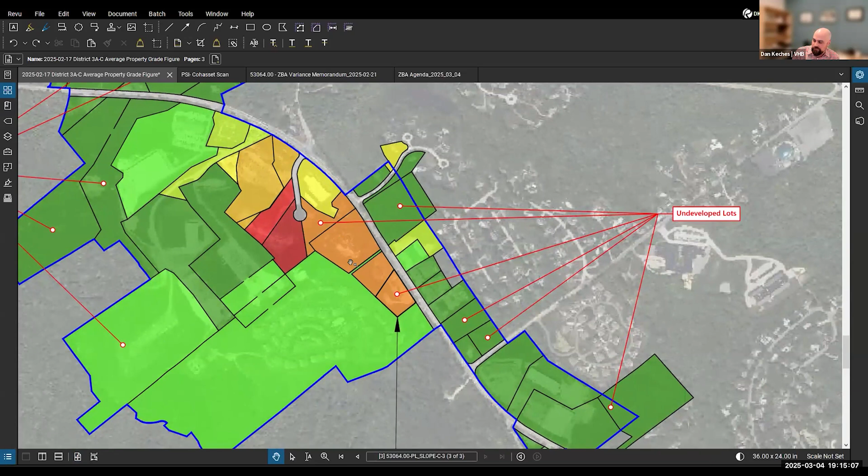Just for clarification, you're saying though that the 5 parcels that are in orange have similar? Yeah, it's a little hard to tell. There's actually 2 shades of orange, but the other 5 would be 1, 2, 3, 4, 5. So the 2 red and the 3 adjacent. Okay. Limited to just this section of Route 3A. Okay. Yeah, we can proceed unless anybody has any questions on this.

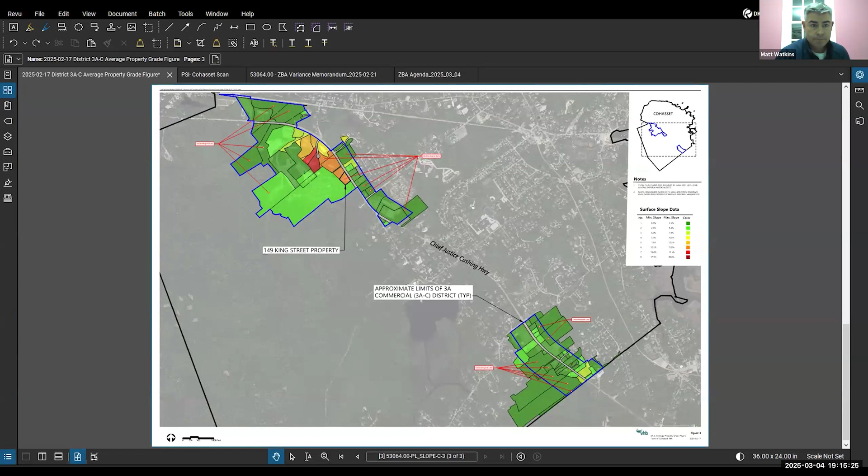Hi, good evening. My name is Chadd Ingram. First time meeting you. You are in receipt of my February 20th report. I'm a geotechnical engineer in a 20-person firm that specializes in soils, geotechnical, structural, and drainage relating to construction from Florida to Massachusetts. In the interest of time, I will keep this brief, and any questions you have, feel free to interrupt me, or we can certainly speak afterwards.

Essentially, we were retained to go up to this site to perform the geotechnical investigation. We're normally on a site 1, maybe 2 times. In this particular case, we're on the site 3 times for over 5 days, given the fact that the soils were very unique on site. As professionals, we rely heavily on NRCS mapping. That is the platform that we professionals use. And about 95% of the time, we find these sites to be generally consistent with what is mapped. This site would be an exception to that.

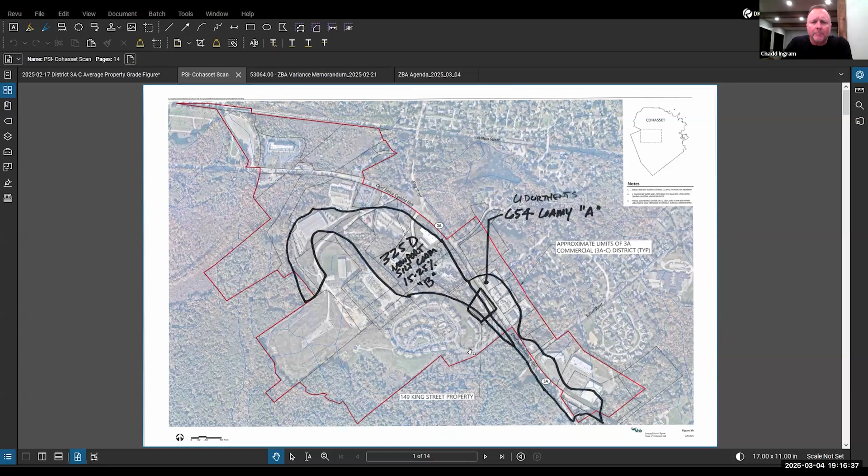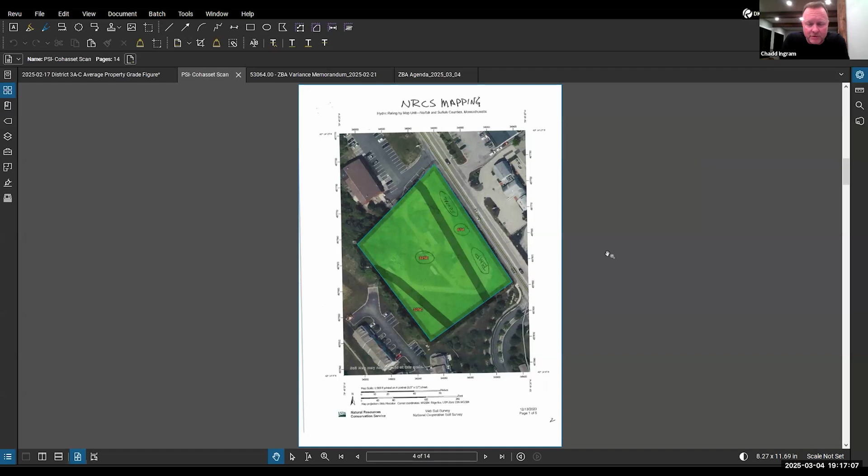We are anticipating going through the district. If you want to slide down, Dan, we were anticipating finding loamy soils, and see if you can keep going down for me, and very granular soils. Another sheet down, you'll see that 2 site soils here, loamy soils, well drained, good infiltration, moderate concerns of erosion. And in the front of the site, actually, excellent soils for construction, for septic, for stormwater. But again, this is not what we found on site. Next.

Right here, you'll see the 2 site soils, and specifically they have ratings of A and B. So they should have high infiltration, should be easy for construction, low potential for erosion. What you really have on this site are Cs and Ds. And the reason those groups are like that is a couple reasons. Number one, we found a high percentage of silt and clay on this site, not anticipated, coupled with the fact that you had historic consolidation and disturbance from decades ago. Having the fill and the disturbance from decades ago have put a surcharge on this site that further reduced these soils from having the potential of infiltration and also having a high potential of runoff as well as erosion. Accordingly, that has forced us to provide a lot of mitigation techniques that would not be used on most sites.

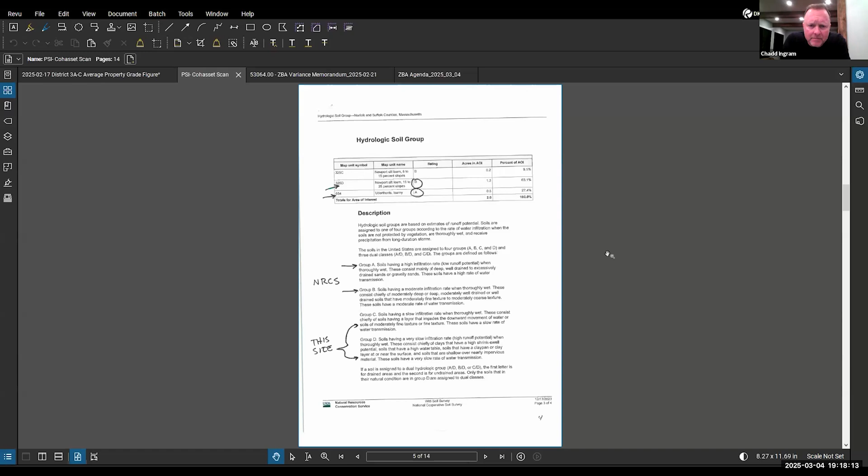Can you slide down, Dan? One of the things about infiltration is the front of the site, we expected to find very well-drained soils that consist of sands, sandy gravel, sandy loams. You would be infiltrating at rates, not to get technical, of 5, 8, 10 inches an hour. And as Dan goes through the next two slides, you'll see that's 0, that's virtually 0, and that's 0. So 60% of the tests we took out there have a result of approximately 0. And what that means is, though you do have some sands present, they are not functioning as the soil mapping indicates them to be. So this is an anomaly. This isn't something we normally see. And again, it comes down to high consolidation and the lack of the soils that should be on the mapping.

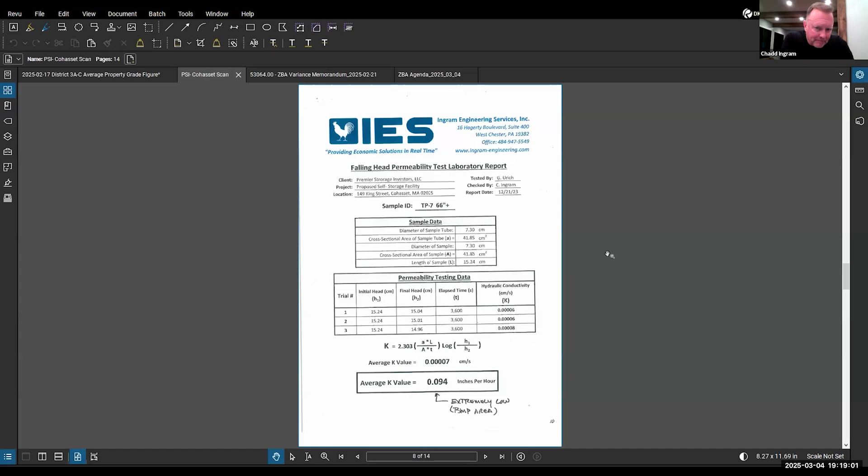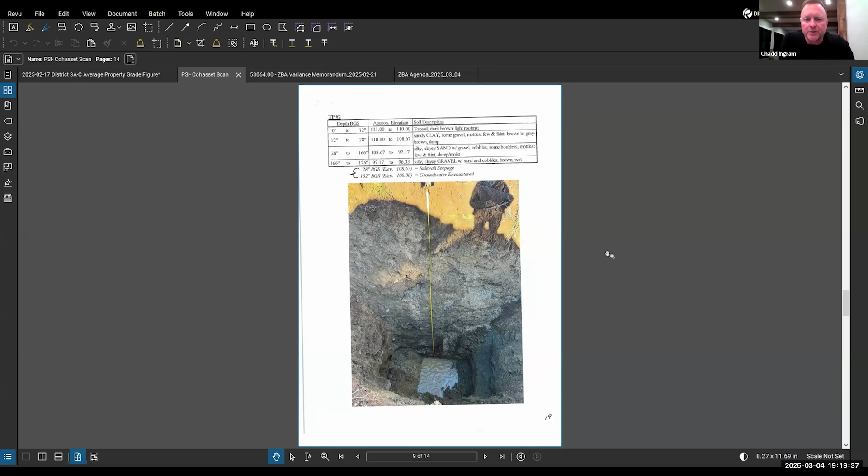Couple photos I put in here. And this relates to something called sidewall seepage. Again, very uncommon. We go out, we drill, we do test pits, we try to find groundwater, right? We want to find where the bottom is. And what we found was consistent with groundwater. We expected to find that. What's not consistent is finding sidewall seepage, or water seeping through the sides of the soil walls, not just immediately above the groundwater, but 7, 8, 9 feet above. In fact, these two examples we show here, you can see that we're literally 8 to 9 feet above the groundwater table.

Water is seeping through. And in this case, you've gone down, I think it's 12 feet, 144 inches, yet 5 feet down, you have water seeping through. And it just so happens to correspond to where the historic fill was placed. Consolidation has occurred. And what that means to all of us is, well, it now becomes very stringent to construct, and there's additional measures that have to be done in the form of under drains and similar infrastructure outside of standard construction to get that water away from buildings, to get that water away from your stormwater facilities, et cetera, get it on its way so the site can function as intended.

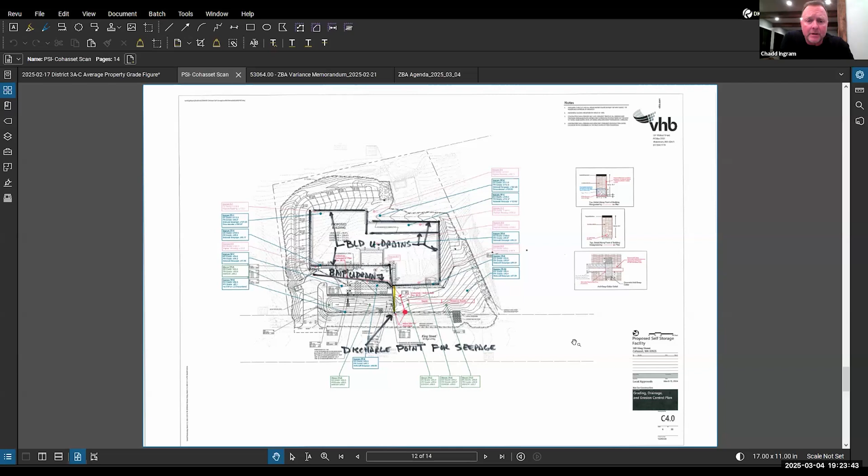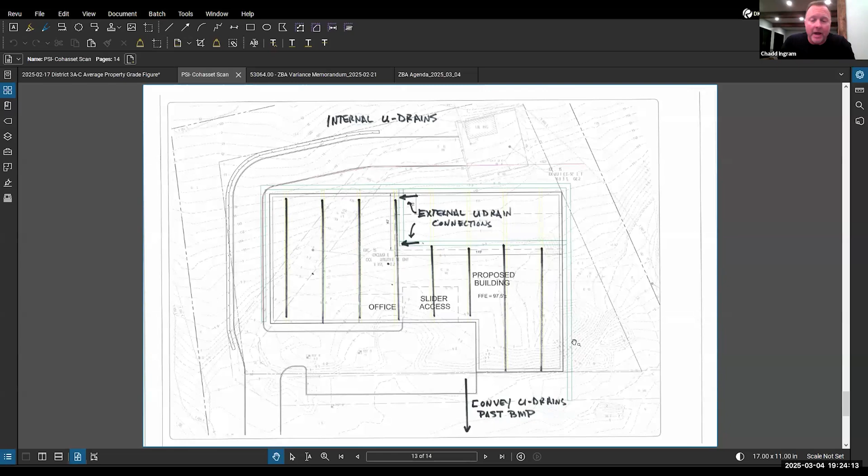You want to go down one more, Dan? Here's a building pad under drain. We called them fingers in the example for the cost estimate we put together. This is approximately 1 foot of stone with perforated pipe traversing in about 40-foot centers, 30-foot centers. Again, to make sure that that water, through what we call capillary action, isn't wicked up with the clay, having the slab get wet and causing moisture, high humidity, and potential mold within the building.

Slope stabilization. Because the soils are so consolidated, so stiff, so dense, so heavy with the silt and the clay content, and coupled with the perched water, which is very unusual, this isn't standard straw matting. The matting that I drew this up many months ago and gave it to Dan, this is very expensive synthetic matting that has to be put in by specialty contractors to ensure that during construction, and it would have to be staged in different areas in the sequence, as this is installed, then additional grading can take place and phased.

Because if not, on a normal site, you would simply seed it, put some matting down, and you're done. And in this case, it has to be done in certain phases to ensure that you don't have the erosion runoff with the sediment and obviously causing a violation. I know it's a lot of material. I'll try not to keep it too technical, but I'm more than willing to answer any specific questions any of you may have.

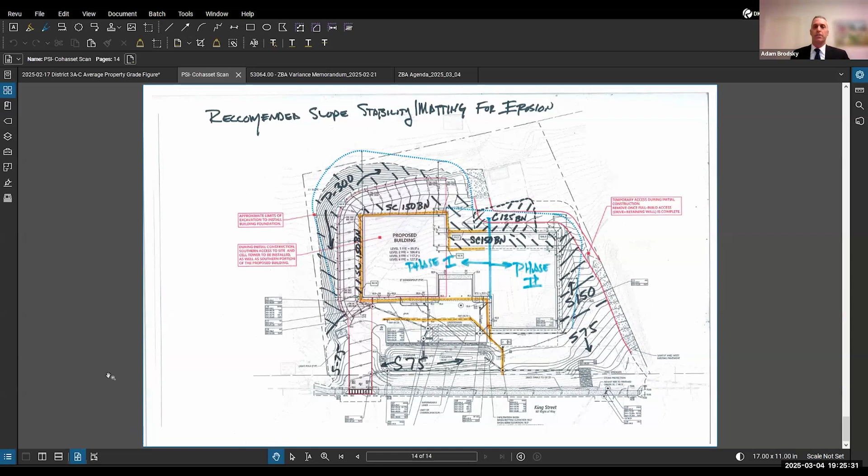Chad, this is Adam Brodsky. Can you just review the total premium and costs associated with all of these additional measures, please? Sure. Dan, if you want to go up a couple slides, I think I'm about $874,000. And that's for this site. It's somewhere around $200 to $250 a square foot, Adam. If you were to put in a smaller building, you would probably need slightly less. The problem is, as the building gets smaller, the square footage price for all of these additional mitigation measures would increase. So you could be looking at $300 to $400 a square foot.

I'm not going to speak to the economics or viability of it. That's not my skill set. But the bottom line is, no matter what structures put in here, these measures have to take place for this site to be a reality. And Chad, these are costs over and above the typical site and construction costs that you would find for a site like this? Correct.

And as I stated earlier, we run into a lot of jobs. We get hired to do problematic jobs along the East Coast. And hey, we've done 1, 2, sometimes maybe 3 portions of this. I haven't come across a site that we would have to do this many mitigation measures above and beyond your typical site work construction costs.

Thank you. I'm sorry, Mr. Watkins, for interrupting. No problem. I guess any board members at this point have questions for Chad?

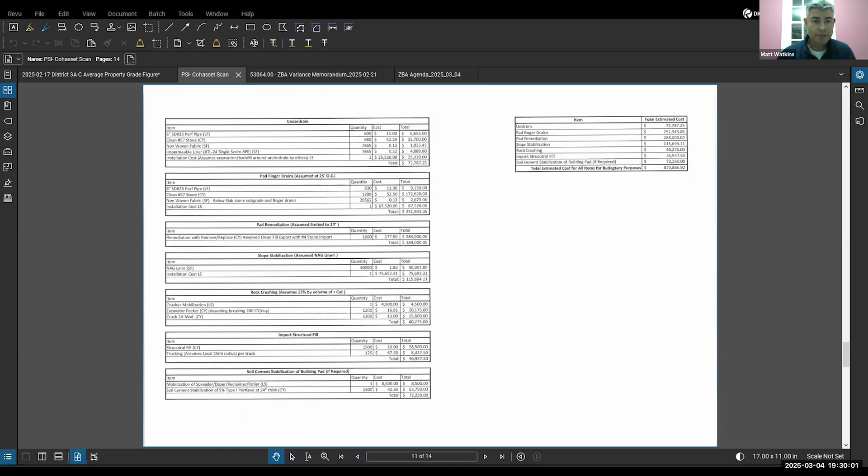Okay. Thank you. Certainly. If nobody has any other questions for Chad, we can proceed to the next portion. Thank you, Mr. Watkins. Greg Morse?

Great, thank you. For the record, Gregory Morse, registered engineer, Morse Engineering. I've been working in Cohasset over the past 20 years on similar site development projects. I'm a licensed engineer with the state. I'm also a licensed soil evaluator with the Department of Environmental Protection. I started work on this site back in 2020. My firm conducted soil testing at the site, and I just wanted to concur with everything that I've heard so far today, which is that this is a unique site.

The soil testing we did, where we were able to get percolation tests passing for a septic system, was extremely deep. The perc tests were down 18 feet and 16 feet below the ground surface. It was not up closer as you would encounter on other sites. I've worked on several other sites within the 3A commercial district. The figure that Dan Ketchus had put up earlier showed the location of the district in Cohasset, which essentially is broken up into 2 parts. There's what I would refer to as the southern portion of the district down near the Scituate town line.

Down there, I've worked at the O'Donohue Insurance Company, the Mulaney's and Theodora's property, the Amalang Tradesman Building, and the Village Greenery. I didn't have these soil conditions, nor did I have the topographical constraints at any of those locations in the district. The district is relatively flat, and the soils are generally suitable for septic systems and generally suitable much closer to the ground surface.

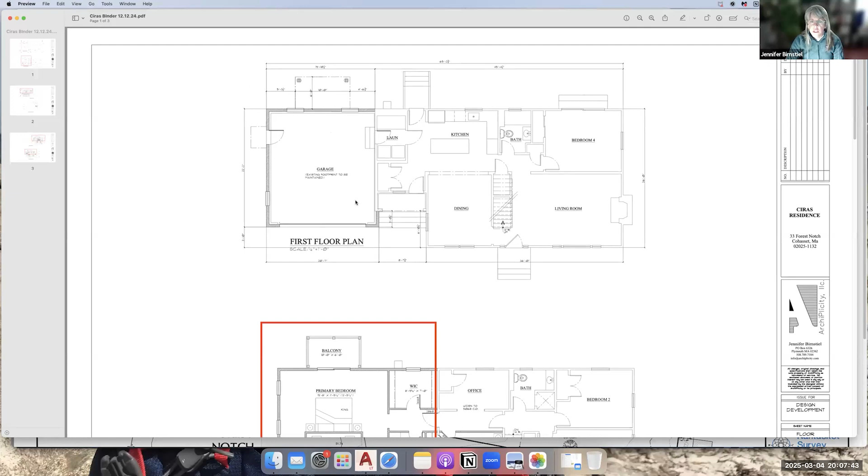So I'm gonna share, I'll actually share the site plan first. Right now, we are looking to add a, can you see this okay? Yes. We are looking to add a second floor on an already existing garage footprint. The corner of the footprint currently sits within the setback.

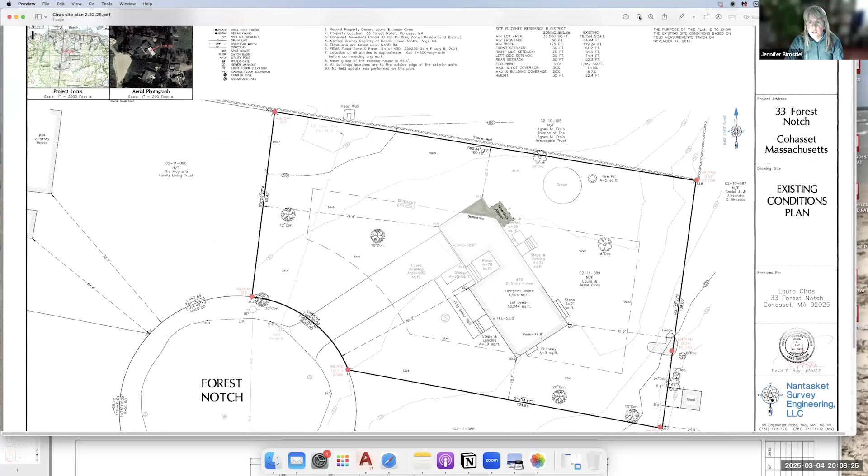This lot, though, is a corner lot, so it has kind of a not quite typical layout as far as the lot setbacks are concerned. So I spoke with the engineer who thought we might qualify for a special permit based on the current footprint of the house. This is currently within the setback.

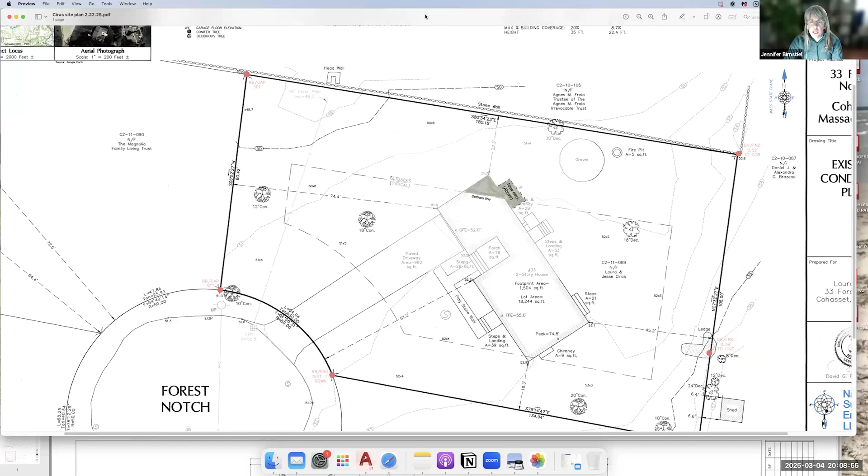The new deck would be partially within the setback and partially not, but we're planning on keeping this exactly as it is and just adding a second floor on top of it. And I will share the actual plans and elevations so that you can see them also.

So this is the existing garage. It may or may not be that we can keep the existing foundation, but we're keeping the existing footprint. It all depends on how far down the foundation goes. But right now we're maintaining the exact footprint of the garage. And this is the primary bedroom suite that we're adding on top.

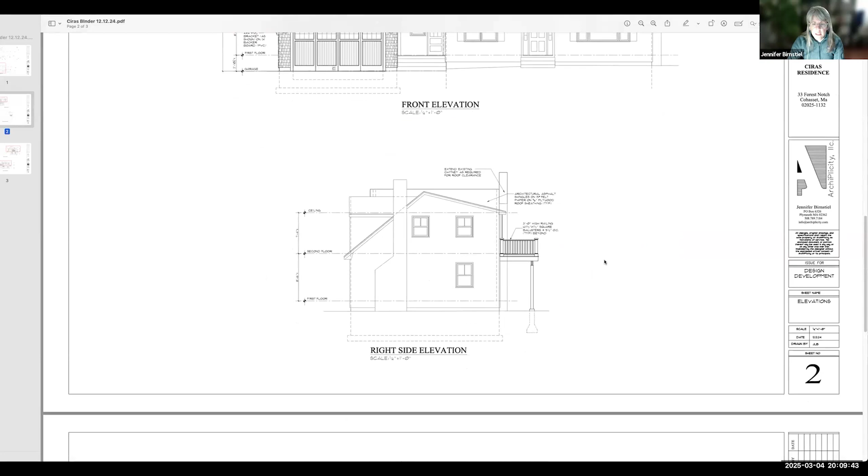And this is the change in elevation. We're trying to keep the roof lines low so that the height of the garage doesn't exceed the height of the existing house. And the deck is just a raised deck on posts outside of that footprint. So very simple and not very big. The balcony is 10 feet by 6 feet, just enough to put a couple of chairs out there and sit and look at the backyard.

And this is the way it looks from the back elevation and from the left side elevation, where you can see more visibly the corner that is in consideration. What's the height of the current garage? The height of the current garage is 17 foot 8.5. Yeah, that's good.

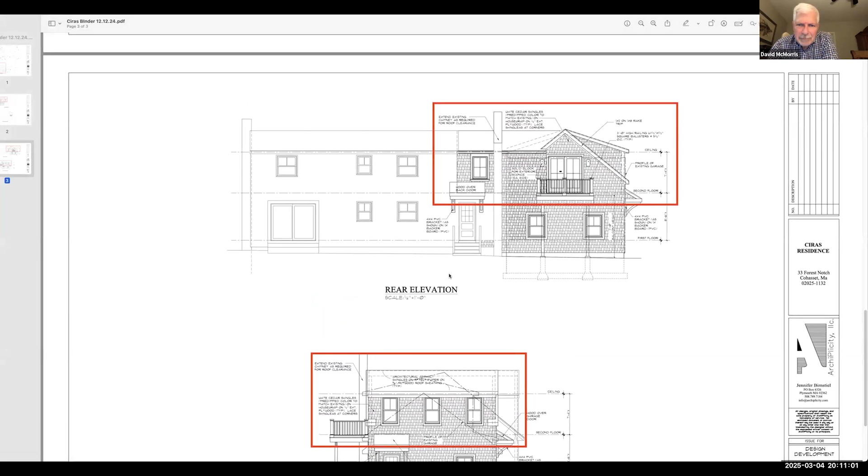And I can share my AutoCAD screen too if you want a picture of the existing. No, it's currently non-conforming, which is good. So you're not creating a new non-conformity. Okay. Anything else you wanted to review with us, Jennifer, or I could open it up? No, I think you can open it up. It's pretty straightforward what we're looking to do. We're trying not to rock the boat, just get them a little extra space.

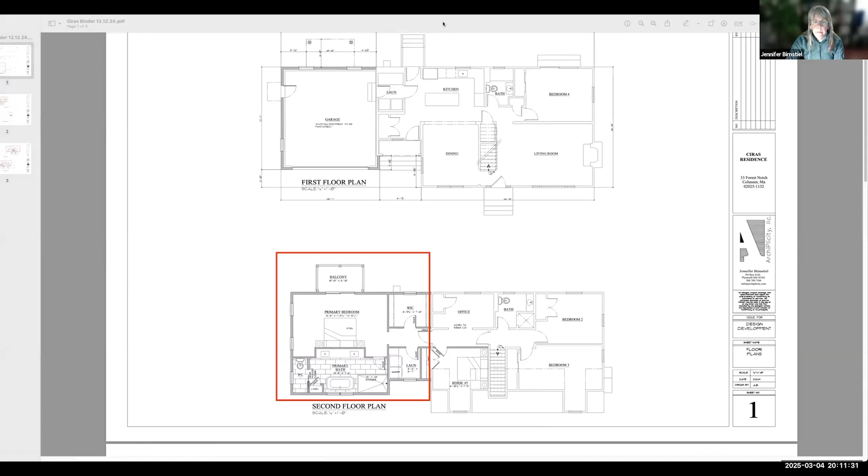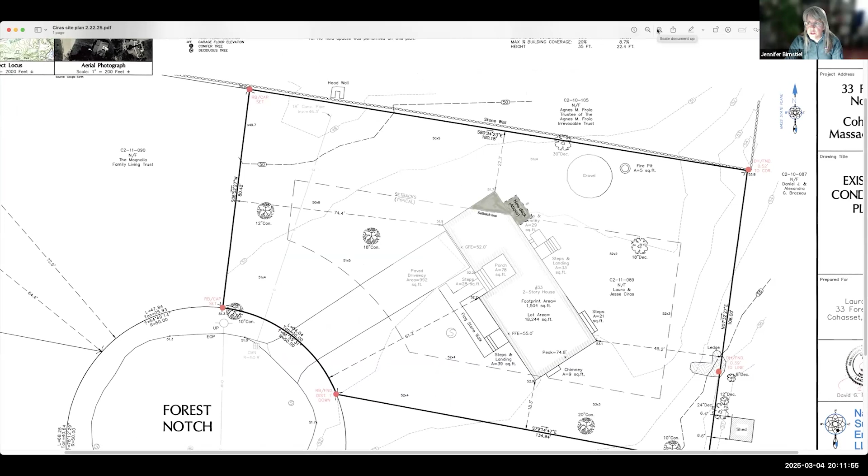Can you show that first diagram you had up, the shaded site plan? Yeah. And I can zoom in if it makes it easier too. And the new deck you say is off the second floor, right? Yes. All right, I'll open up to the board for questions.

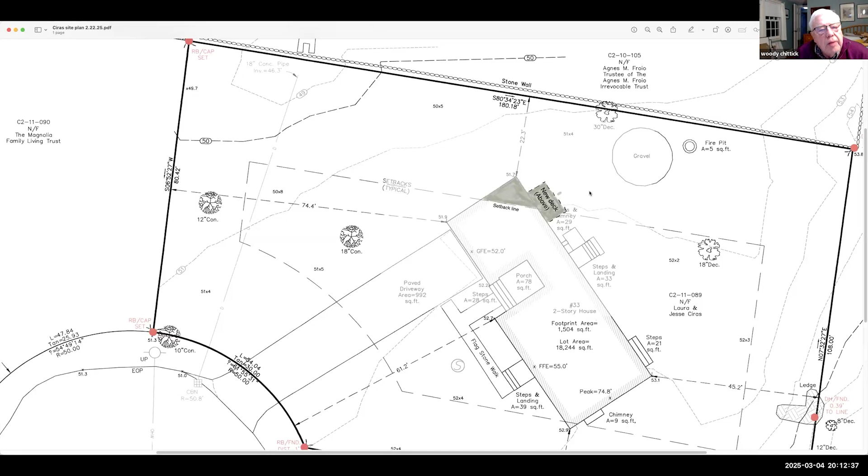Well, why don't you address the key issue in the relief you're seeking, this is Woody Chittick, which is: is it or is it not going to be significantly more detrimental to the neighborhood? I think we understand what you're doing. Yes, and we don't believe that it'll be significantly more detrimental to the neighborhood because it's not visible for the neighbors. It won't impact the part that's visible, and won't be impacting any of the other neighbors as far as the appearance.

And we believe that the appearance of the new addition that is conforming will add to the look of the house versus being detrimental as far as its appearance. And the nonconformity won't be visible from the street. So I don't believe that it'll add to the impact.

And have you heard from the neighbors, particularly the Froios, who will be looking at it? I have not. Ross? I don't know if Jesse has heard from anybody. We have not, but we can reach out. It's always certainly a courtesy.

I mean, yeah. I am the owner of the Magnolia Family Living Trust, which is the abutter. So I just wanted to get that on the record. I'm the closest abutter. Because I am the abutter, I cannot make any comments or participate in any voting for this special permit. Okay, thank you, Lee.

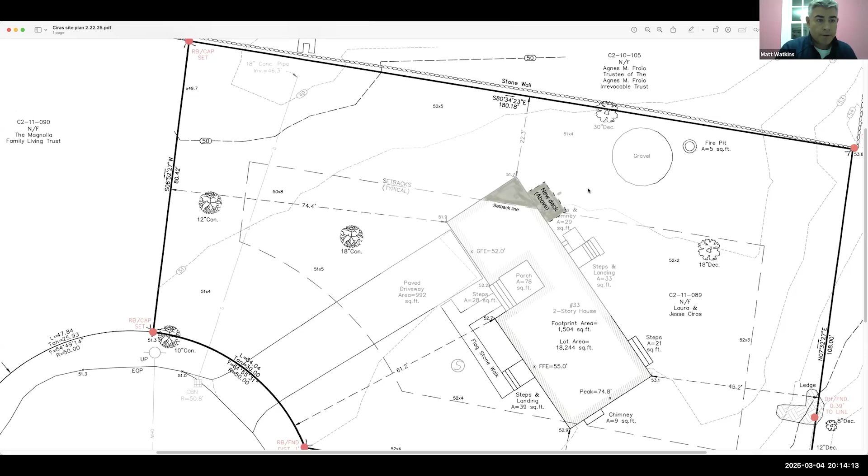Charles Higginson. I'd like to note that none of the neighbors are shown on this site plan. I believe we've asked everybody to do that. Correct.

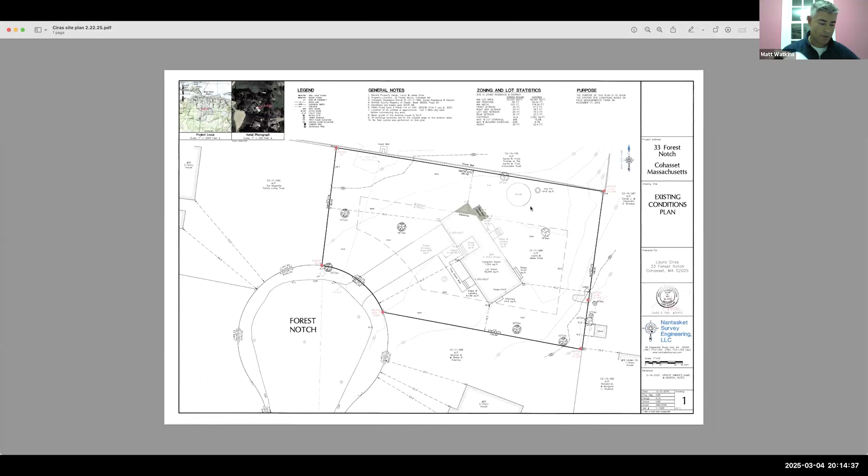Although I think this is a zoom? I wanted to say on the initial, I think this might be zoomed in. Yes, that was zoomed in. So it does have the neighbors shown on there. I was just zooming in so you could see it better. My house looks like it's shown on there. It looks like I have a big yard in the front.

Yeah, it looks like it's an old site plan from 2016 on the one that I have in my packet. But it does look like the abutting structures are on there. Other than the Froios, whom I do not know, but they're the ones that are going to see this. The other people are kind of unlikely to see much, given the vegetation and things, having looked at it.

It may not be a problem, certainly. I'm not suggesting it is, it's just a comment. Who knows the site? Yes, I do know the site. The line between the Froios and this site, it's wooded. It's a wooded strip that fills out completely in the summer, so you can't see anything. And in the winter, it still stays pretty foliated.

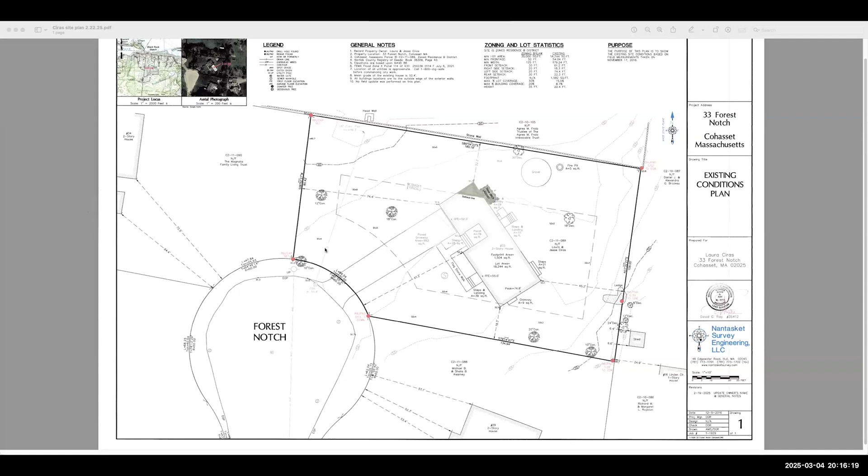Yeah, thank you. It's pretty much brush throughout the winter. And then in the summer, the trees fill in. You really can't see any of the neighboring houses in the back area. I was just going to look and see. I have some pictures of the existing site. I don't know if that would be helpful. Well, most of our board goes out to the properties prior to, so I think we're fairly familiar. Okay. If you have it handy, you could put it up in case somebody hasn't seen it.

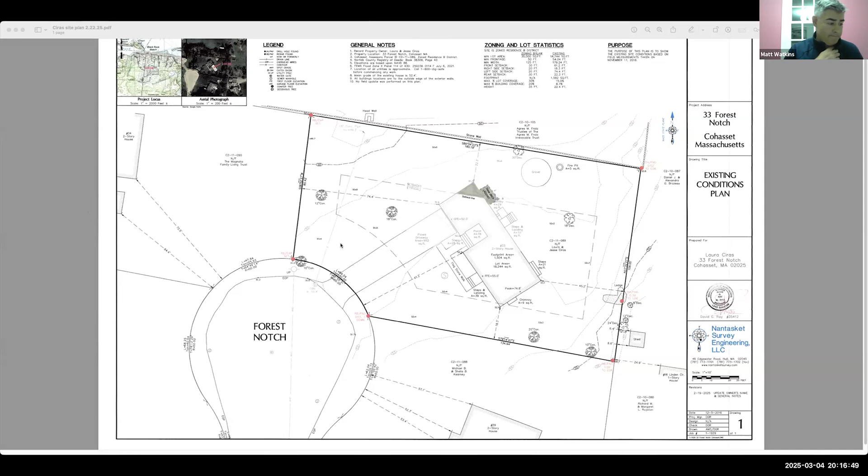This is a picture looking in that direction, so you can see the foliage from here. How wooded the site is behind the house. That's another view, and then looking in this direction.

Well, the only reason I brought it up was as a matter of courtesy for the neighbors, not that I suspect that they'll object. I have no idea, but I didn't see anything that seemed egregious. No, we agree, and that would be our intention prior to making any moves in terms of construction there. Well, something for us to consider, but be that as it may.

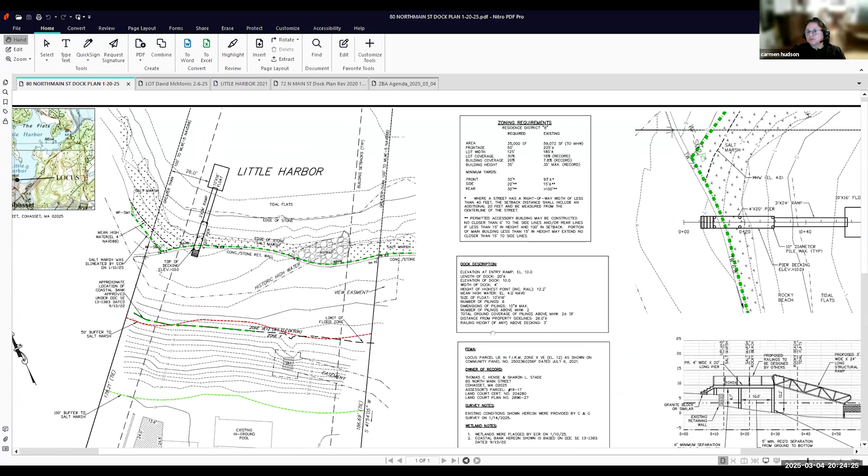This is a dock application. The site is located at 80 North Main Street. It has been developed as a single-family residential property. The house is currently under construction. The lot and the building are conforming to all of the zoning requirements. The dock that we're proposing is going to be in the rear, right here where you see it. The property on the left is 90 North Main Street. The property on the right is 72 North Main Street. This is a closer view of the dock.

The pier will be 20 feet in length. It will have a 3-foot wide by 24-foot ramp with a 10 by 16 float. It is going over a very small portion of salt marsh. There will be a total of 6 piles supporting the 20-foot pier. Stairs will be on the landward side. And the float, which is the portion of the dock that is closest to a property line, the side property line shared with 90 North Main Street, is 26 feet away. So it's greater than the 20 feet required by zoning.

As you know, Section 9.4G5 has the requirement that the ground footprint of a dock cannot exceed 200 square feet. We only have a total of 6 piles, not even 6 square feet in footprint. They cannot exceed 20 feet in height. The maximum height here is 12.2 feet. We're proposing 3-foot railings.

We also wrote in our application the reasons why the dock project can be approved. That's under Section 12.5A. And most of this, as you know, is for all special permits, so they really don't apply to docks. Ingress and egress, traffic flow, and fire access is not applicable. Pollution to water facilities and drainage also is not applicable. Regarding noise, vibration, light, dust, smoke, heat, glare, or odor, this doesn't apply either, and we're not even proposing lights on the dock. Refuse collection is not applicable.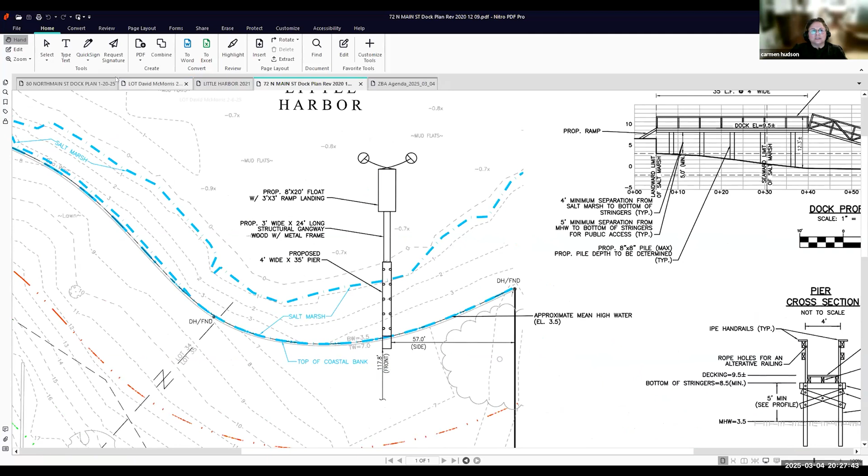And regarding any comments, we have received an order of conditions from the Conservation Commission, and we're not aware of any comments from the Planning Board or the Board of Health. And at this time, I would be happy to answer any questions the board may have.

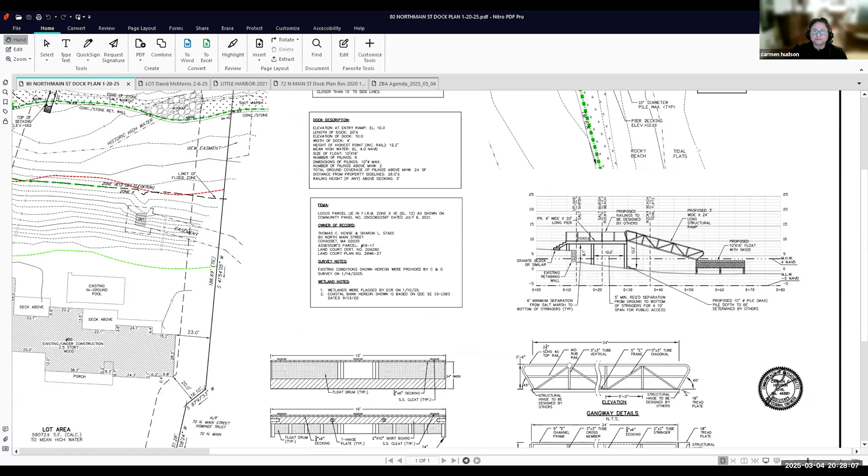Great, thank you, Carmen. Thank you.

Yeah, actually, you know, I wrote the decision on 72 North Main, the dock next door, and I did look that up earlier today, and it's very similar in proportionate size. And actually, even the float had got narrowed a little bit by the Conservation Commission, so it's the exact 10 by 16.

And it seems to me like that dock is pretty appropriate for that area, and the dimensions that you mentioned with the square footage and height, setbacks, etc., seemed pretty standard to me. So I don't have any questions, but I just figured I'd mention that to the board too. I did look up that 72 North Main. It seemed to be very similar in size and scope to that.

Any board members have questions? Nope. No, Matt, another one that looks relatively straightforward. Okay. Any members of the public have questions, comments? If you could either raise your hand and we'll promote you, or if you'd like to put a question or comment in the chat.

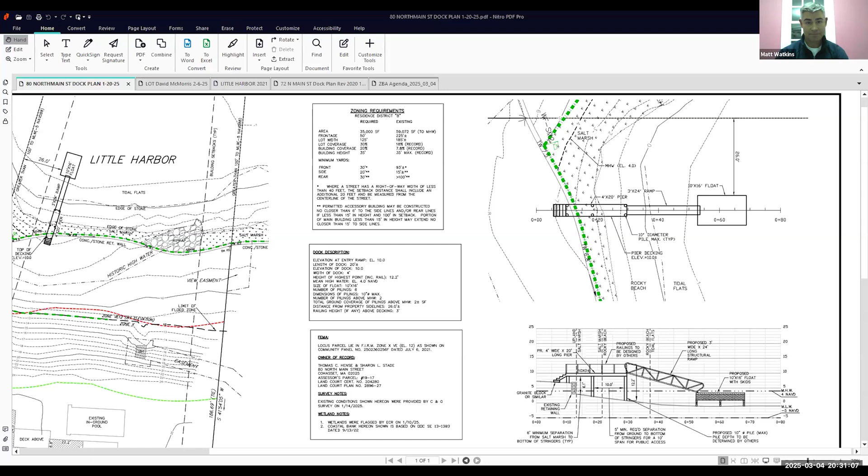Okay, yeah, I'll second it, but let me just, Carmen, one point. Once we start deliberations, the hearing is closed anyway. You or your clients can't speak, so it's a judgment call on your part. That's what Matt was alluding to. If there's new material, you probably should be here. If there's no new material, it's pretty unlikely any will be introduced.

Okay, so since there are no questions from the board or from any abutters, there will be no new material submitted by us? Can't say, but if there is a blockout period, what is it, Julia, 1 week or 2 weeks of information? It's generally a week and a day, so it's the Monday before. We don't allow last minute submissions unless it's pretty significant.

Yeah, I think the only thing I was saying, Woody, is technically, because the hearing's continued, we have to open it, which means somebody could have public comment. It's very unlikely. What I would say is if you were on that portion and there's no public comment, you don't want to hang around for the rest of the meeting until we deliberate.

And we don't have anyone tonight, but in other words, we're not making a motion tonight to close it because we need to get a draft decision for the next meeting. There's an outside chance that somebody could come with a comment. Okay. I didn't mean to complicate things. Sorry if I do.

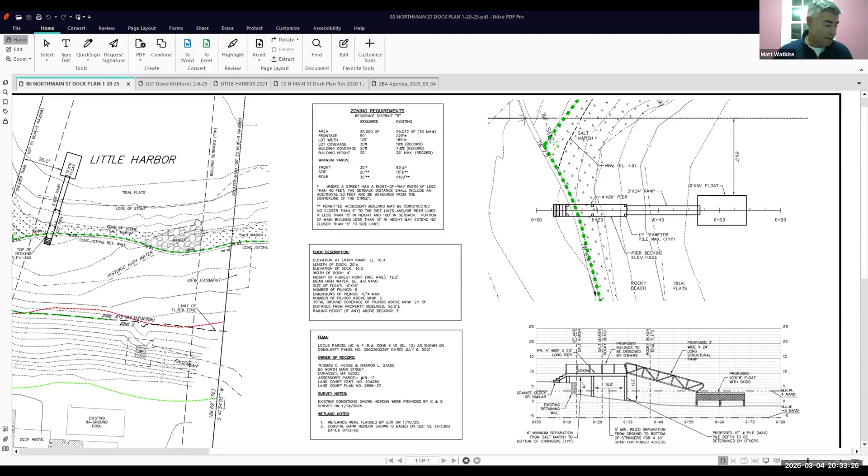Our next item of business is a special permit for 95 Atlantic Avenue, which is an application for a special permit to expand the single-family dwelling. This is Woody Chidick. I'm recusing myself in this one. Okay, thank you, Woody.

And it looks like we've brought John Landy forward. And Yasmin, if you guys could introduce yourself for the record and your affiliation. Sure. This is John Landy. Sorry, I'm not on video, I'm in a hotel room. We're a property owner with Yasmin Landy. Hi, I'm Yasmin Landy. As John said, I'm his wife, and we recently purchased 95 Atlantic.

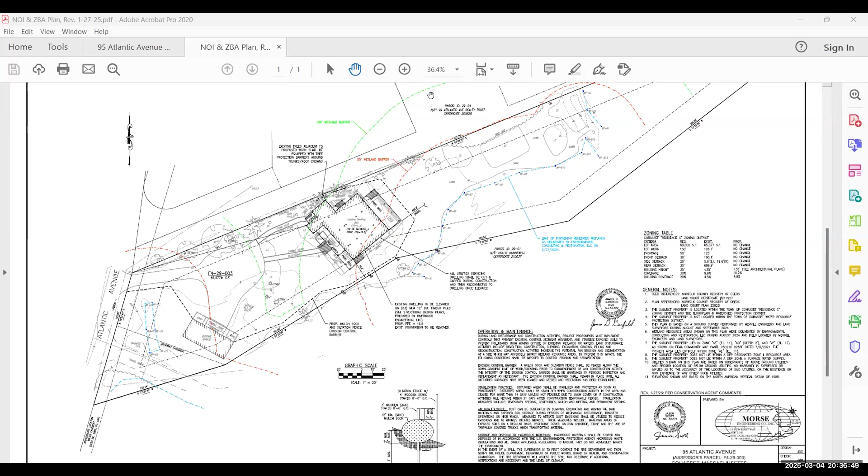For reference, the existing ground contours around the home are at elevation 9. And the existing home sits at elevation 11.5, so basically right at the 100-year floodplain. The lot itself is conforming with respect to zoning, but what's non-conforming with the house is the lot width. The lot width is required to be 150 feet, and how it sits, it's 128.7 feet. And secondly, the side yard setbacks. On the left-hand side right here, the existing home is at 5.6 feet from the lot line, while 20 feet is the requirement. And on the right-hand side, the right corner of the house is at 19.6, where 20 feet is the requirement.

The proposal here is really two parts. The first portion is to raise the elevation of the home. The home would be lifted up. New timber pilings, a total of 63 of them, would be placed underneath the home. The home would then be put back down on top of those piles at a higher elevation. We're proposing an elevation of 16.5, so it provides significant freeboard above the 100-year flood event. The pilings are designed in accordance with NFIP and FEMA requirements.

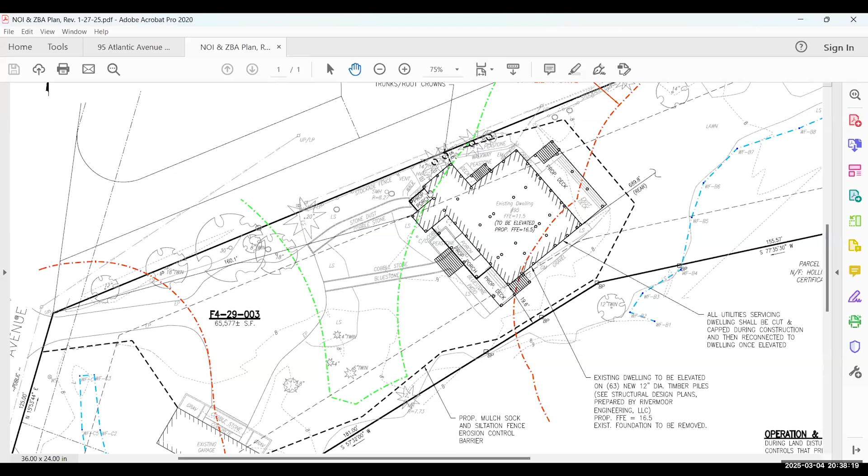In addition to that, we were reconstructing and altering a couple of porches and decks on the property. The front left corner here, we're adding a small portion to an existing porch, and I'll go to the architecturals in a minute to further detail this, because this is a covered porch and it is within the side yard setback. On the front of the property, we're adding a porch with new steps on the front. We're adding a new deck on the side of the building with egress stairs down. And on the ocean side of the building, where there was an existing deck, we're slightly expanding that and providing new steps down as well on that deck.

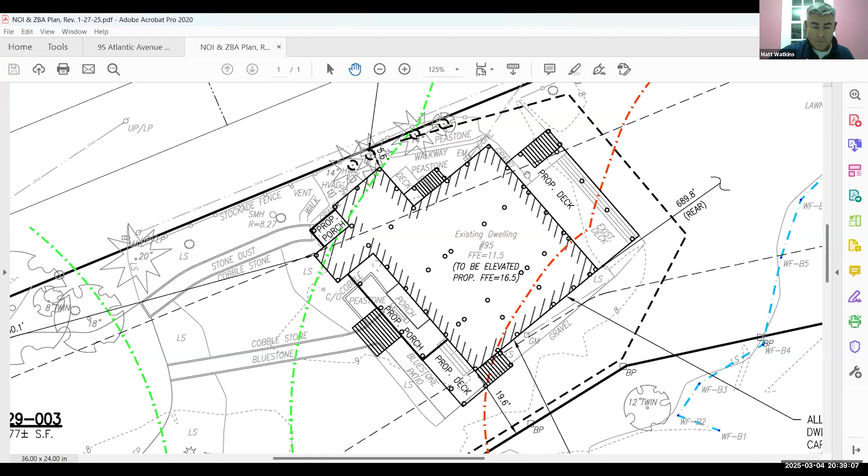And Greg, the 63 pilings, what was the height of the pilings? So the top of the pilings will be at elevation 15 approximately. And then we have approximately 1.5 feet of beam and floor system to get to the first floor elevation of 16.5. Okay. Let me just get the architectural plans here.

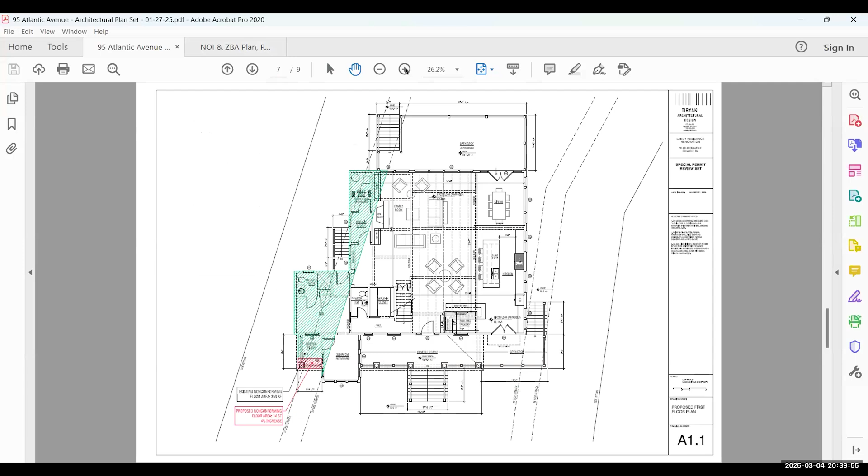So on the architectural plans, what John detailed on the first floor plan here is that front porch that's at the front left corner of the building inside of the setback. We were adding a small amount of space to that, which is highlighted in red here. He's highlighted in green the area that's non-conforming with respect to the side yard setback on the left side. In red is the expansion. That expansion is approximately 14 square feet. It represents a 4% increase in that covered porch area. These are not enclosed porches. These just have roofs over them, but they are not enclosed porches.

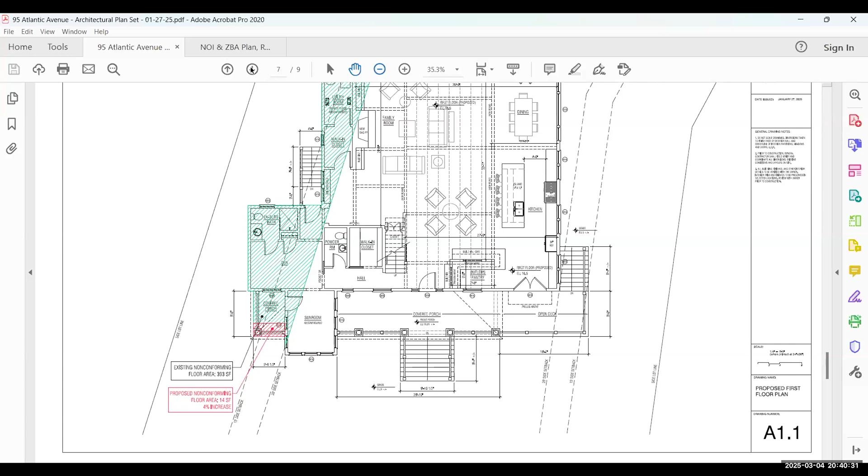And building height, we have a diagram of building height. The building height here, even with the raised pilings, is compliant. It's a 35-foot maximum height in the zoning bylaw. We're coming in at 33 foot 4 inches for the max height, and that's from the average grade around the building to the top of the roof peak. So it is compliant height-wise.

In the zoning bylaw, section 8.3, the board is authorized to issue special permits for structural changes, extensions, and alterations if it finds that the proposal is not substantially more detrimental to the neighborhood than the existing non-conforming structure.

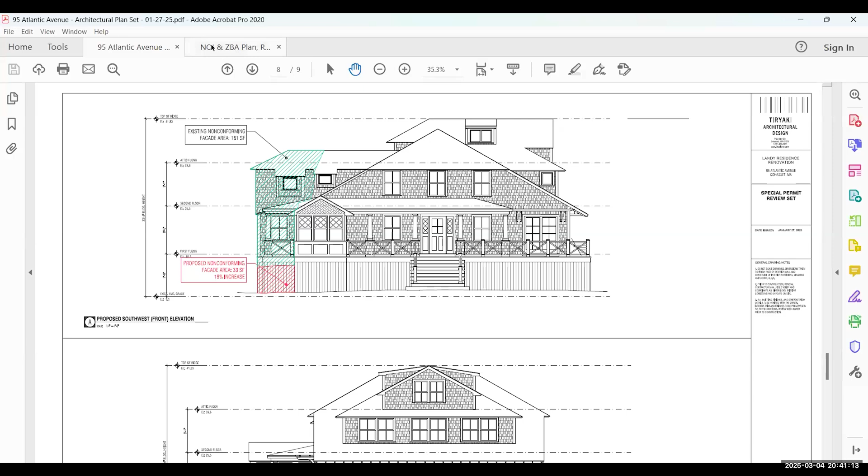Going back to our site plan, the proposal here is no closer to the property lines than the existing home sits. It's open decks and open porches. They're not new enclosed living spaces. The height is fully compliant. The foundation is fully compliant with FEMA, so it's in better compliance with FEMA standards.

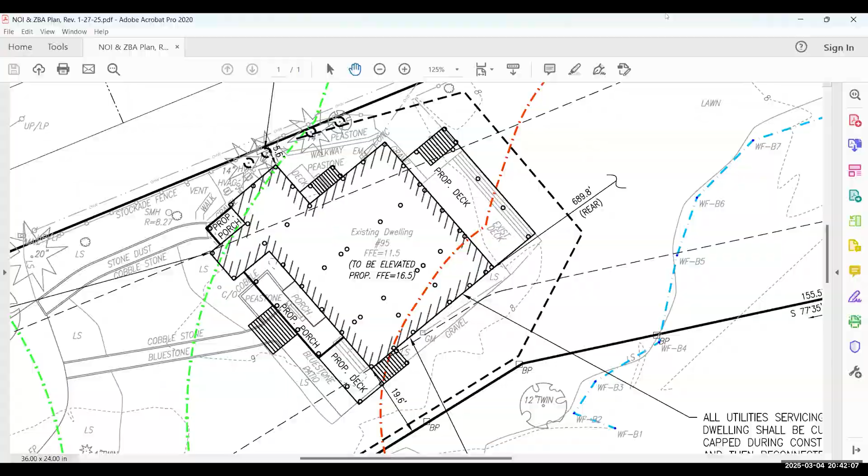I would add that the Conservation Commission has already reviewed this project and issued an order of conditions. The board was sent a copy of that from Charlotte Pechtel, the conservation agent, during the comment period. I'm going to turn it over to you for questions or comments. Okay. Board members, any questions for Greg? Or to me.

Again, I note that there are no neighboring buildings shown on the site plan as our instructions ask. Yeah, I did notice that when that was brought up at the previous hearing. We could certainly add the abutting buildings. We're not working closer to them than the existing conditions at the site. I apologize, that's not on the plan.

But yeah, that is one of our requirements, to have the abutting structure. So if you could add that to the site plan and just submit that prior to the next meeting, that would be helpful. Yep.

Yeah, I was just double checking. The reason I asked the question on the height was that the existing home is like 28.3, you have. And the piles are 15 or 16.5 feet? Correct. So that's an elevation. Okay. 16.5 is the first floor elevation.

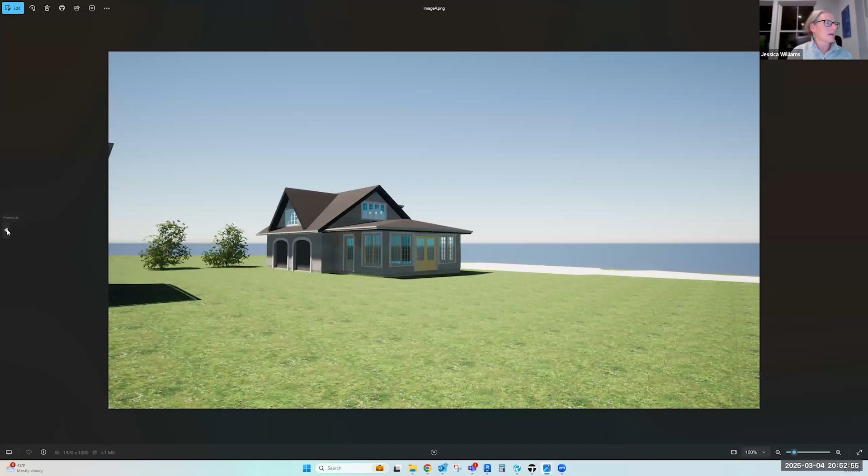This is just an image of what the garage will look like. And from that easement, this is the easement. There's actually a couple of trees, and we would actually go through between the trees to get down to where the garage is. The garage design is intended to look very much like the house. This is the design of the garage. We meet all of the requirements. I'll just go to the site plan here.

For an accessory structure in your zoning bylaw, under your dimensional regulations, there is a note for 7 and 8, which allows that for an accessory structure that's under 15 feet, you can be within 6 feet of your side setback in 2 directions. However, this is our front setback. This is Forest Ave here.

And while we are well beyond 100 feet from the easement to what we consider the front of the garage, the house is oriented so that Forest Ave is the address. So this is considered our front. So our setback is only 60 feet; we can't meet it to 100 feet because we only have 115 feet of lot to work with. So that's where we are asking for the variance.

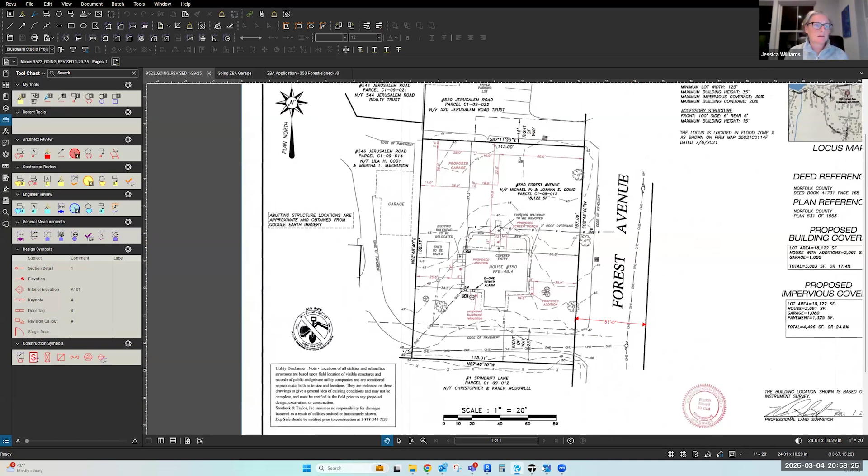And you can't use that right of way to the north, that comes off the parking lot of the neighboring house? You couldn't access it that way? The intention of this design is to improve the site. The house currently, we are no longer using the front door as a front door, and the Goings would like to access their house from the easement that they own, versus having to use a right of way that they don't own. So this would just keep all of their activity on their own property versus needing to use a right of way on another property.

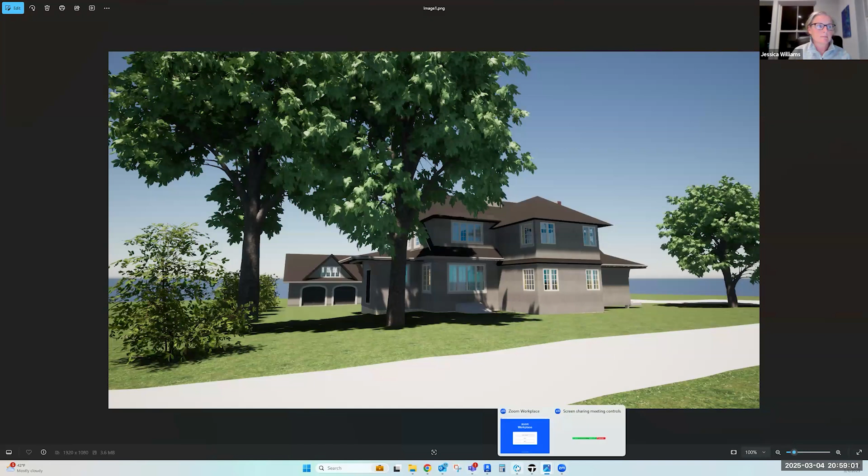Okay, well, I'll turn it over to Dave and Matt and everybody else in just a second, but if you're going to create a nonconformity, which is what you're doing by locating the garage here, you have to pass the 3 tests of a variance, and you should address that. You're creating a nonconformity, and so you should address those 3, I think, really up front. So I'm gonna reference the bylaw so that I have that in front of me. But the request for a variance is under, excuse me for 1 second, 12.6.

May I jump in for a moment, Jessica, just to come from an aesthetic viewpoint? The dumpsters are behind the garage, and for us to access the garage using that right of way would be difficult because that's where the dumpsters are located for the condo building next door, to the left of their garage. If I can be honest, if there's a way we can put our garage there so we're not looking at dumpsters, that would be great. So just in that sense, to do a variance could be a worthwhile thing for us as the homeowners, but I don't know if that makes sense.

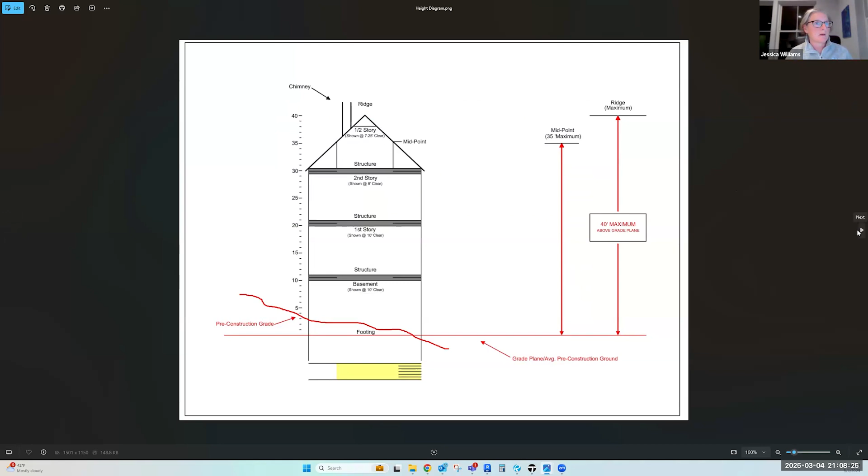I am embarrassed that I was not right about this. Interestingly, I have asked the building inspector and was not told that I was wrong. So, okay, we'd like to ask for a continuance and we'll take a look at what our options are. Thank you. Excuse me, if I may interject, I just want to help clarify a few sections of the bylaw just for your reference. Okay.

So regarding the three criteria for the variances, that is found in section 300-12.6. So it's basically right out of chapter 40A. It lists the 3 criteria, including the soil conditions, shape, and topography, the literal enforcement of the provisions, and then the substantial detriment. So you can find those in that section. It's referenced in your application as well, and I can send you the link separately if you have trouble accessing that.

Also, I just wanted to clarify, Woody, are you referring to the definition of height in section? Okay, I am seeing that. And I can send you that link as well, Jessica, if you need to review that. John Hallen, the building inspector, is not on the call tonight, but I can confirm with him these references that are on the website and get his perspective on if those are outdated and need to be removed. I apologize if they're on the website and inaccurate, but I will check with him to see how those stand with the building department.

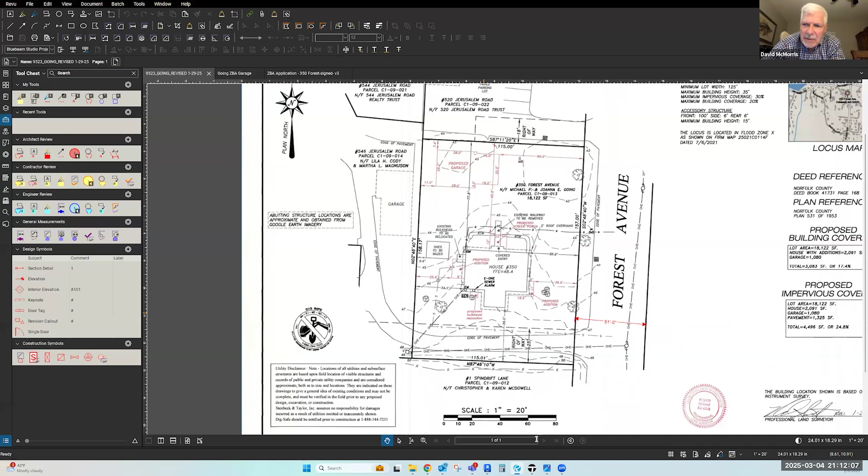I mean, it would seem to reason that if the town were to change the height... I understand it's time to end this conversation, but I'd like to point out, this structure is a total of 19 feet high. And we very specifically made it to match the existing house and to be as attractive as we could. A structure that would be 15 feet high, this midpoint line is right there. So that would not be an attractive structure.

So potentially when the town decided to change the height to the ridge, they might have considered changing the height of an accessory structure closer to the setbacks, in your notes 7 and 8 in your dimensional regulations, because that makes sense proportionally. It's just disappointing that they didn't seem to pay attention to other areas of the height. Again, I don't want to get into a big issue on this. Obviously, I'm extremely disappointed that I looked at what I thought was accurate and it clearly wasn't. So if we can move forward with a continuance, I appreciate that.

And I do want to thank you. I understand you're volunteers. I do the same thing locally in Duxbury. I'm sorry if I sound a little contentious, that's not my intention. I'm just disappointed. No, but you understand our role is to apply the bylaw. We weren't involved in crafting it or modifying it, really. I understand. Potentially the planning board should take a look at that. Well, they did a major overhaul of the entire bylaw, and as we move along we're finding little holes here and there. Did you find a big hole for us?

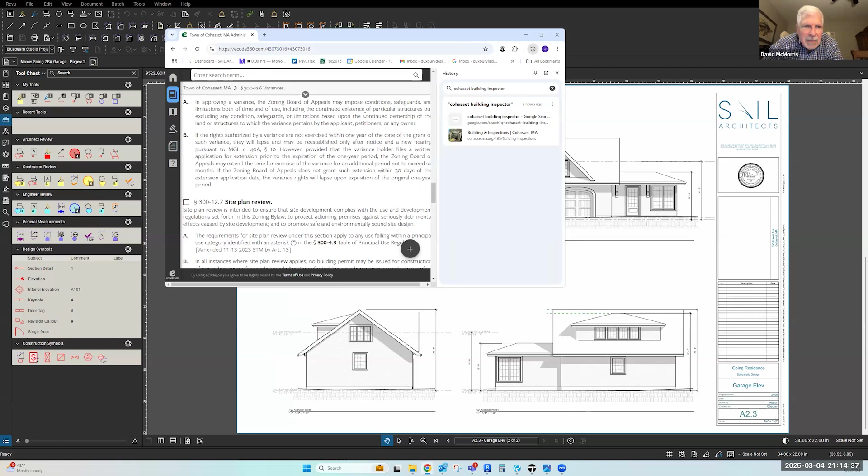All these changes happened in the last 2 or 3 town meetings, so the glitches are starting to show up now. I'm just surprised that if it changed 2 years ago, that you have a document on your... Yeah, I don't. Today. Where on the website is the document that you were showing? Hold on a second.

Town of Cohasset. Building department. Right here, you zip all the way down. Height, definition, and diagram. Okay, so I presumed this was accurate. All right, so that's not actually in the zoning bylaw, that's in the building inspector's site. Okay. Well, when I'm looking for specifics in towns, I typically know that the building department has the most accurate information. I completely understand how that happened and why you would look there.

I'm somewhat comforted that the zoning bylaw itself is actually correct, but this definitely needs to be fixed on the building inspector's site. Potentially, there's a lot of things on here that... It's potentially, yeah, and I reviewed. I think that's why we have an IT department that's supposed to deal with that kind of stuff, but.

I had difficulty reaching the building inspector to ask the proper questions to get to this point as well. So this may have been something that could have been cleared up long ago, but it was difficult to get anywhere with him. And when I found these things on the website, I assumed I was following the rules.

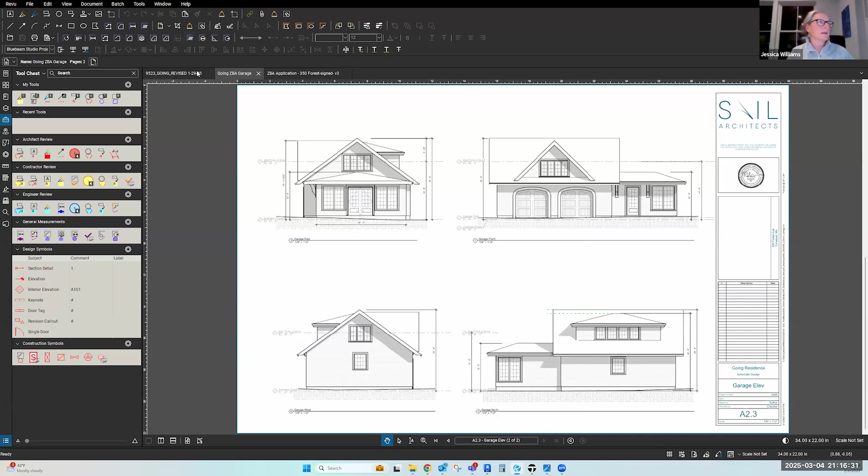So if we move it 20 feet and 20 feet, it can be the same height as we've drawn? If you can make it up to, you can make it taller. You could get to 25 feet high. Okay. Yeah. And we don't have that to move it, correct? 20. It's already 11 and it's 7. So it would have to move another 13 and 9, yeah. 8, right. Yeah. So let's just regroup offline.

Jessica. Thank you guys so much. Thank you. Sorry, we're disappointed. Okay. It's gonna be the prettiest house in town, though. Jessica's a great architect. Well, you've also got a pretty nice site, so. Yes, we do. We do. And we purchased the house, or we're allowed to, only because we were keeping the original structure. They wouldn't have sold it to us without keeping the original structure, so, which is nice.

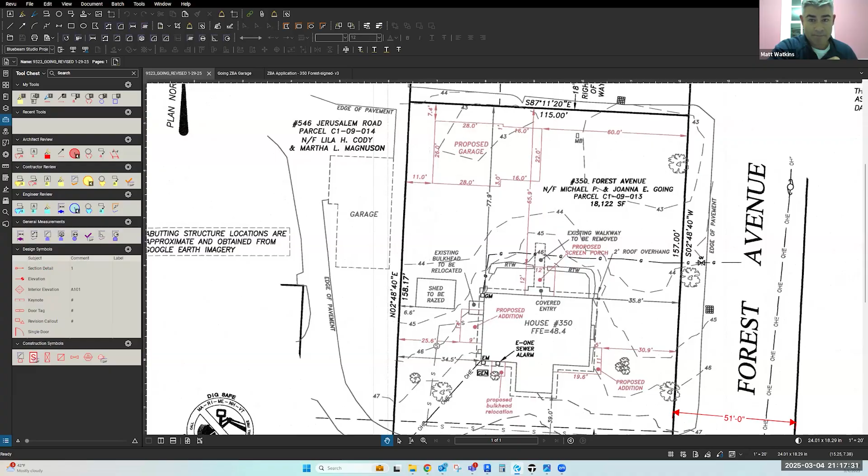Great. Well, we will take any public comments as well, as part of this, and then we will end up making a motion to continue the hearing, and you can keep in touch with us. Julia, I don't know if they should get your email address if they have any follow-ups, or if you've already been in touch with the applicant, but I have her email addresses.

Okay. Julia's been very, very helpful. Thank you, Julia, for all of your help. Yeah, I can loop you in with John if that's helpful. And if I see him in person, I will double check if he can contact you or myself. Thank you all. And as far as public comment, we have I think one hand raised.

Chris, if you could unmute and just identify yourself for the record. Hi, I'm Chris McDowell. I'm the abutter immediately to the south of here. I just had a number of quick questions. It's my first time to this process, so I appreciate the opportunity. And in the future, to the Goings, we got a letter in the mail, but we would appreciate if you knock on the door, ask us a bunch of questions and tell us what you're thinking.

We don't necessarily have any problems with the garage as detailed, but it sounds like it's going to get revised anyways. I just had quick questions for the board, really. The impervious ground, should that include the paving on the right-of-way? When I'm looking at the 30% lot coverage, should I include the pavement on the right-of-way access? Is that impervious ground? Well, whose property is it on? Yeah. It is included in the impervious coverage.